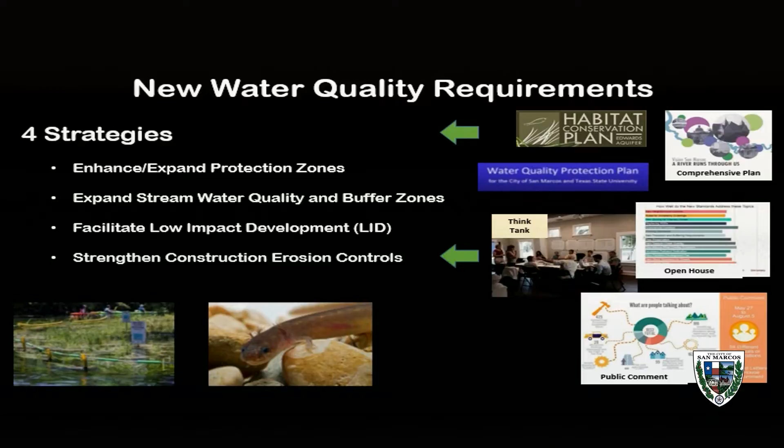All right, as far as enhancing and expanding protection zones, our current code has 2 areas where we have water quality requirements, and they are located on the Edwards Aquifer Recharge Zone and in the San Marcos River Corridor. So the recharge zone on this map is this green area right here. And just to get you a little more oriented, this is IH-35 right here. San Marcos River is right here, and the Blanco River is right over here. So the recharge zone and the corridor, hatched in blue, are 2 areas where we have protection zones, areas where we regulate water quality and require treatment.

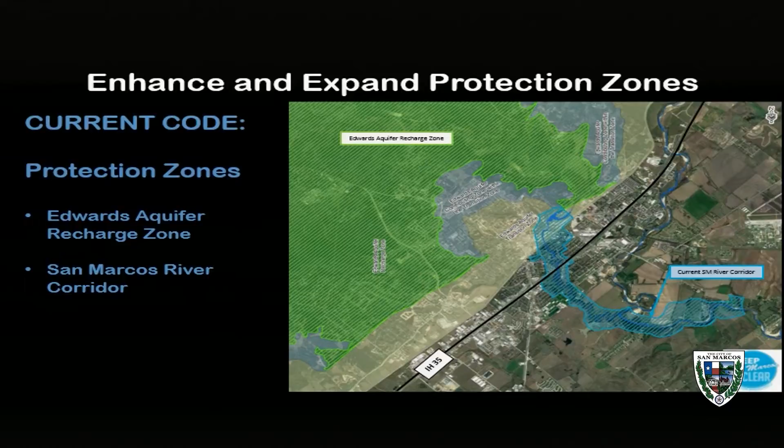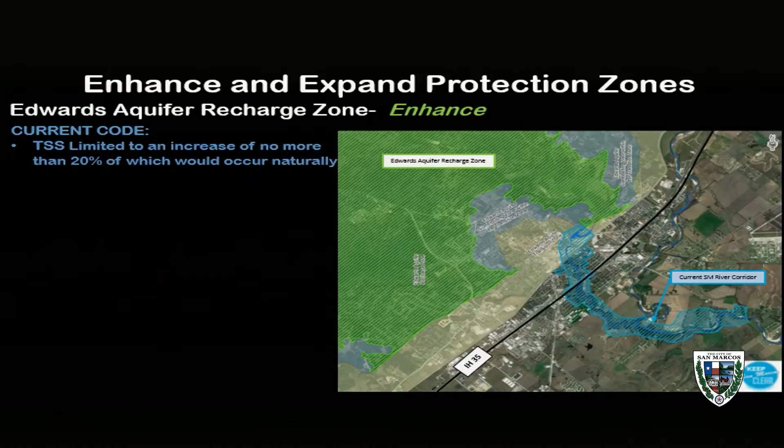And our proposed revision, when it comes to the Edwards Aquifer Recharge Zone, is to enhance the requirements. Our current code basically says if you're on the Edwards Aquifer Recharge Zone, you're limited to an increase of no more than 20% of that which would occur naturally, and that's 20% of the total TSS, total suspended solids. So the proposed revision consists of changing that to 85% removal of total suspended solids, and in addition adding a capture of 1.25 inches from the developed area. That's a capture of runoff from the site of 1.25 inches. And I'll expand on that for just a moment.

So why it's 1.25 inches is basically if you have a 1.25 inch depth of rainfall on the site, you basically capture that and either infiltrate it or release it over a period of 48 hours. So essentially on an average yearly basis, if you capture 1.25 inches, you're going to capture 80% of our total volume of runoff per year. So we have 33 inches per year, so 80% of that is going to be captured and either infiltrated or released over a period of 48 hours.

So that does two things. That keeps water on the site more than having it run off. And secondly, it helps protect against erosion on our streams. Studies have shown that 90% of our total suspended solids comes from stream erosion. So if we can protect our streams more, we are going to do a lot for water quality. So it's not just the total suspended solids running off your site which contributes to degradation, but it's also the stream erosion itself. So capturing that 1.25 inches helps with that. This is going to be required for both new and redevelopment.

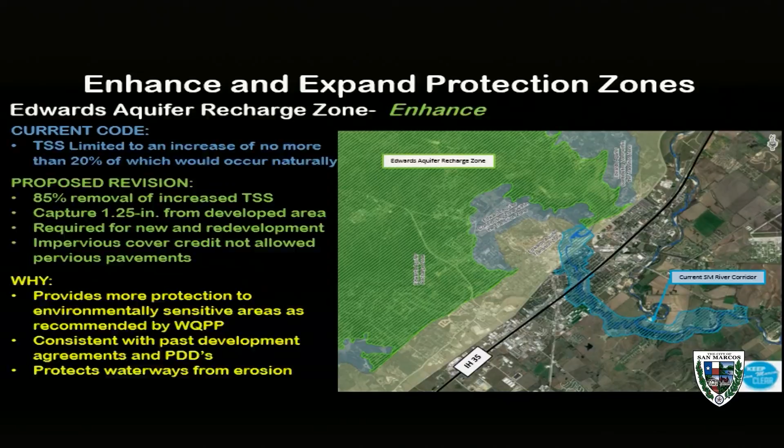Okay, now we're moving on to the transition zone and contributing zone within the transition zone in our city. So remember, the green area is the recharge zone. This blue shaded area that you see here, that is contributing zone within the transition zone. And then this beige area along here is the transition zone. So right now we have no water quality requirements within the transition zone or the contributing zone in the transition zone. So we're looking to enhance and expand requirements in these areas.

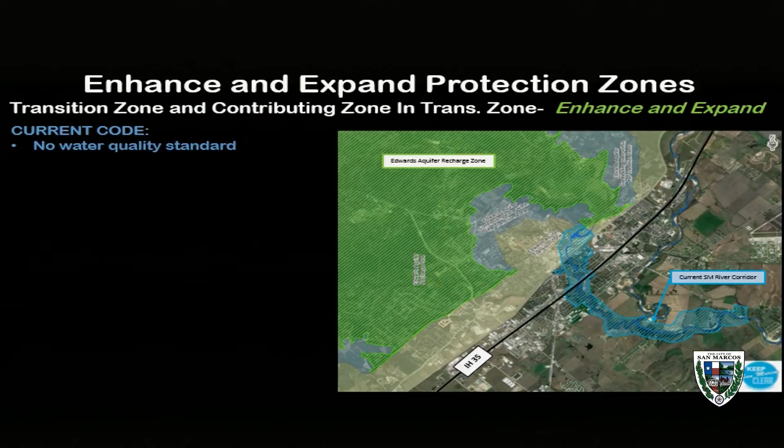So the proposed revision is, if you're within these areas, you have 80% removal of increased total suspended solids. There's also a capture of 1.25 inches from the developed area, which I talked about previously. And again, this is required for both new development and redevelopment. So why are we doing this? Again, it provides more protection to environmentally sensitive areas as recommended by the WQPP. Again, it's consistent with past development agreements and PDDs. And also it protects our waterways from erosion.

So in the protection zones, why 80% removal of TSS and not 85? So there's a bit of a difference between 80 and 85%. Obviously, your water quality is better leaving the site, and also your BMPs, your best management practice that you're using to treat it, is going to be quite a bit bigger for 85%.

And what we've heard from the comp plan and also from the think tank is that let's treat the more environmentally sensitive areas differently than less sensitive areas. And so that requirement of 80% is not quite as stringent because it's perhaps not on the most sensitive area of the city or one of the most sensitive areas, which is the recharge zone. But it could be.

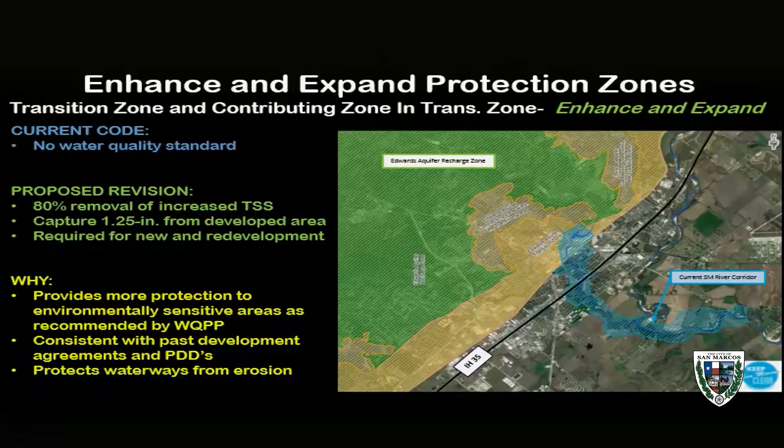So the next area that we looked at to enhance and expand is the San Marcos River corridor. And again, the corridor is hatched in this blue area right here around the San Marcos River. And again, the Blanco River is right here. So right now, the current code says that 89% removal of increased TSS is required if you're within this corridor, and you must capture ½ inch of runoff from your developed area. And it's required for new development. And if you're in this area, there's a 30% maximum impervious cover.

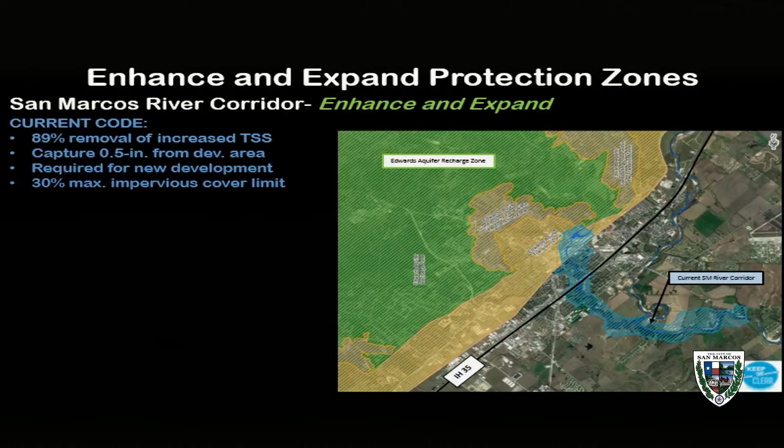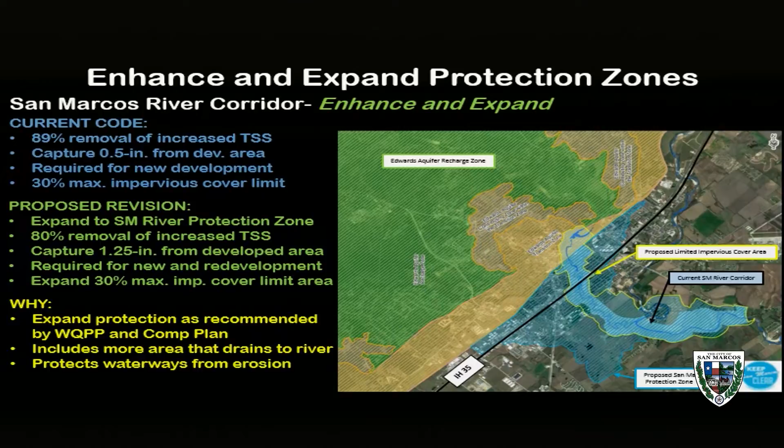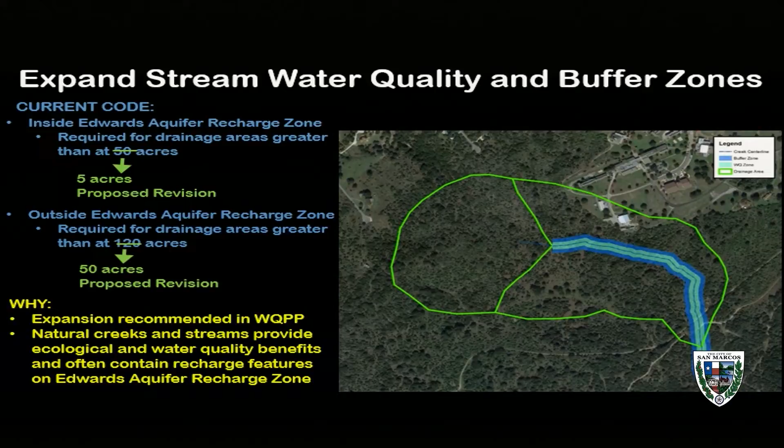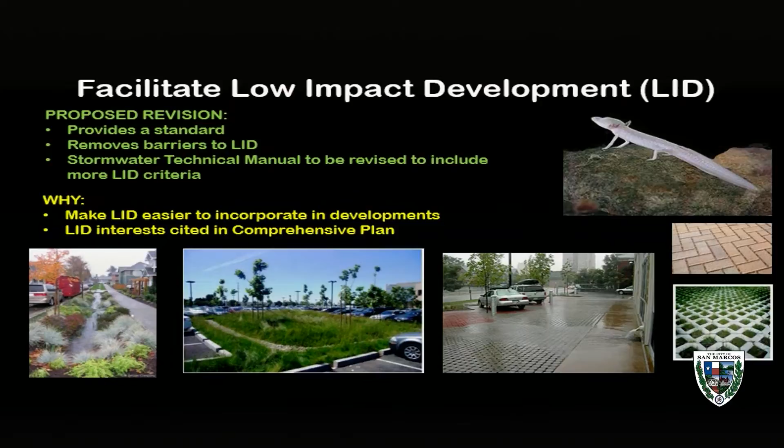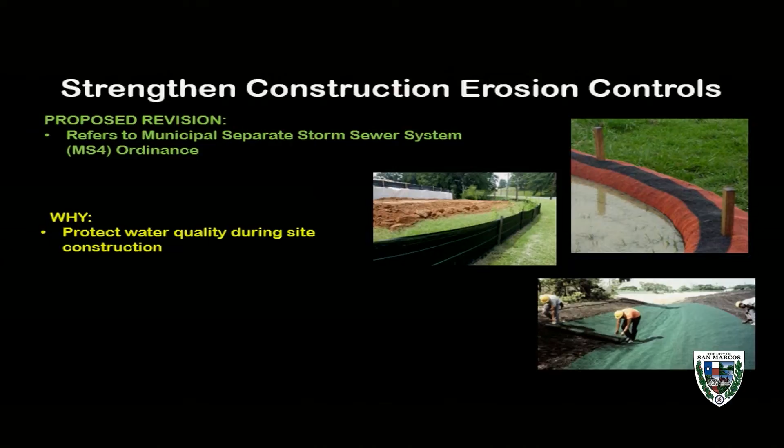Mr. Kelsey? Yes, sir. Just more of a comment than a question. How are we going to get better enforcement of erosion controls? Because we have these in place. Maybe this is to the council. Without enforcement, it doesn't mean anything. And you go all over town and see that it's not being enforced anywhere. So, not necessarily a question to you, sir, but maybe just to put out to all of us, we've got to figure out a way to hire somebody or make a team, because it's up to the citizens now to stay on top of these things. Just a comment. Good point. I don't know if anybody wants to comment on it. Ms. Moyer?

So right now, planning has taken on the brunt of the enforcement side of it. They have 2 individuals on staff now that go out weekly and enforce commercial sites on that, and so that's huge. Ann Gabriel is sitting in the audience. She's one of the staff members, and then Teresa Velo. So they act as our enforcement arm. Our department, in terms of Greg and some of the engineers, provide technical assistance to them on that. But again, it is always a manpower issue on how much we are able to do.

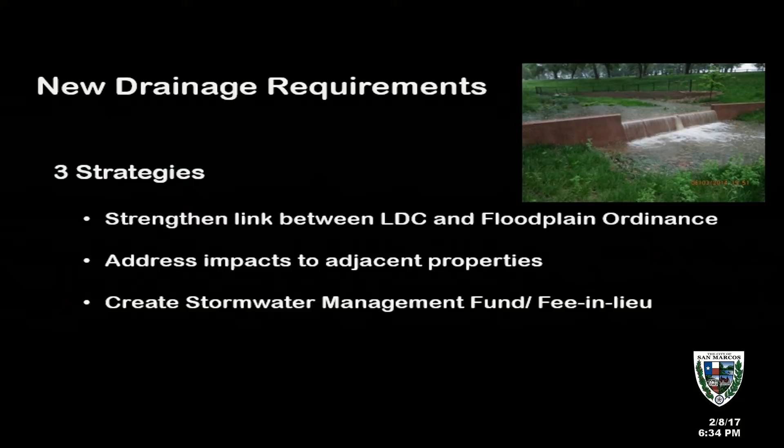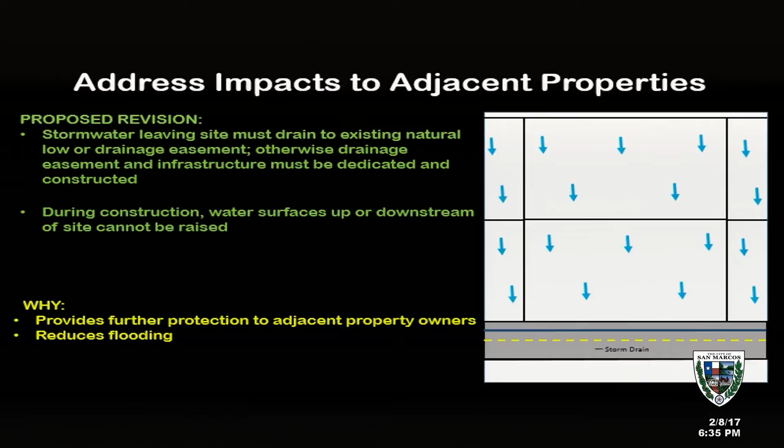So with our proposed revision, if you were to develop, stormwater leaving your site must drain to an existing natural low or drainage easement. Otherwise, drainage easement and infrastructure must be dedicated and constructed. So again, if you develop this lot, you would be required to obtain an easement from this property and also construct improvements to contain the runoff from this site within the easement, and then to a point where there's public infrastructure or public right-of-way that could take care of the runoff.

I have one question on that. Sure. So in this scenario that you're showing us, if they were unable to obtain that easement from a surrounding property owner, then they could not develop their property? There's just no chance? That's a good question. I would think you could probably look at different ways of getting your water to this location. You could perhaps go down this way. Do you have any other ideas, Lori?

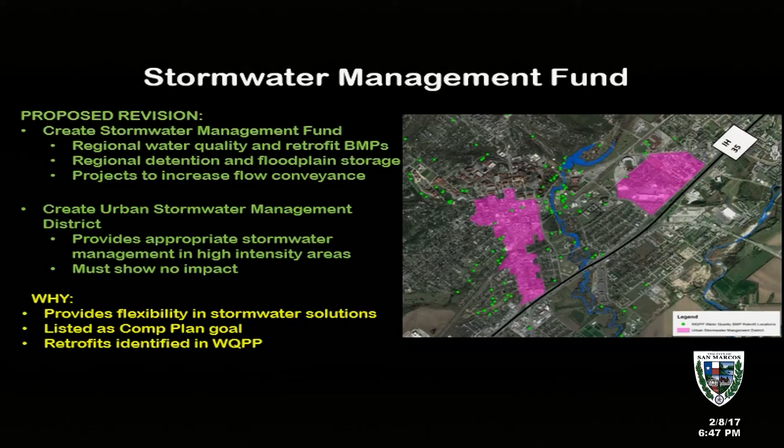I have a question. On your previous slide, you talked about the building being placed on that location. And if it were just left to be water flowing, sheet flow across the neighbor's property, there would be an increased amount of water flow as a result of the impervious cover upstream. Is that correct? It would be an increase in the volume. Increase in the volume. With our detention ordinance, the actual flow rates would not be increased.

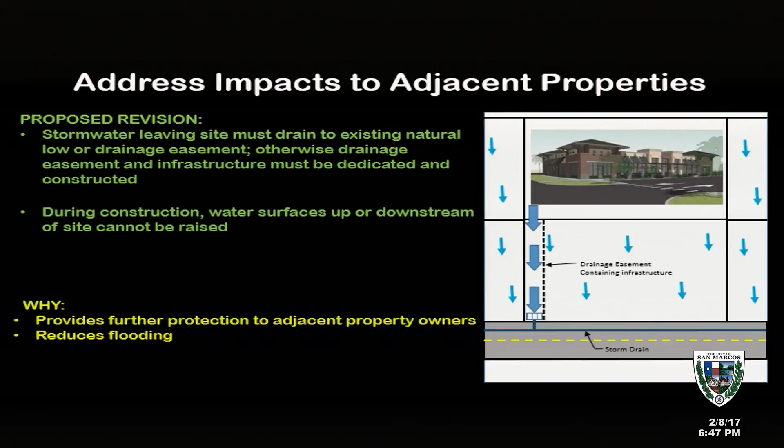So with that, if you bypass it and you put it into a storm drain, then in effect you've taken that increased volume and you've just shifted it downstream, right? The increased volume, yes. So now we've got stormwater management, these districts that you talk about, but there are other areas that are impacted by that increased amount of flow. And one of the concerns we had in our flood workshop was downstream impacts of base flood elevation over time. We'd seen a degradation. In fact, we've seen 3 feet of increase over 30 years, sort of a trend line of 1 foot per decade increase in base flood elevation.

Does our code address in some way the impacts of that downstream increased flow in terms of how do we mitigate the impact of that to downstream neighbors and that continued erosion of base flood elevation? Absolutely. So on our code right now, we have a detention requirement. So you cannot increase the flows off your property. So if you maintain that detention requirement, then you're not increasing flooding downstream.

Okay, well, let me go back to that. I'm assuming throughout time there have been detention requirements upstream of areas that we've seen an increased base flood elevation already, correct? Say that again? I would assume that, doesn't state law require there to be a certain detention for properties upstream? No. In the city we do, correct? In the city we do? We only had detention since what year, Lori? Okay, so it just began in the 80s. Okay, so we've had it 30 years and we'll hopefully have it going forward.